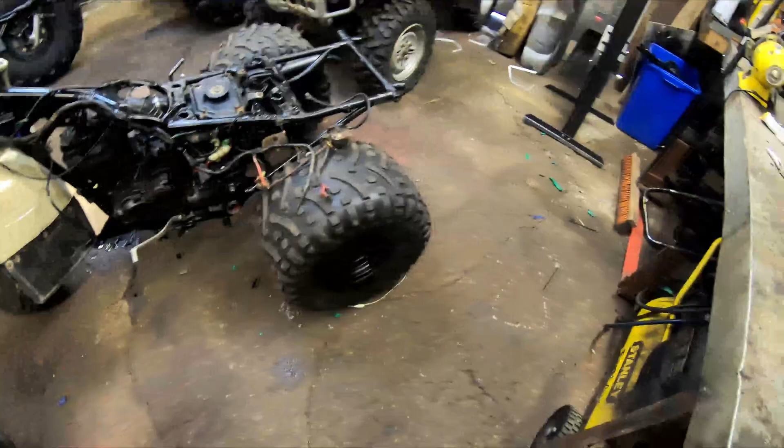Okay guys, so we're all half clean here, I can kind of see the floor again. So alright, I got some of this stuff buttoned up last time, and I'm going to continue on here now.

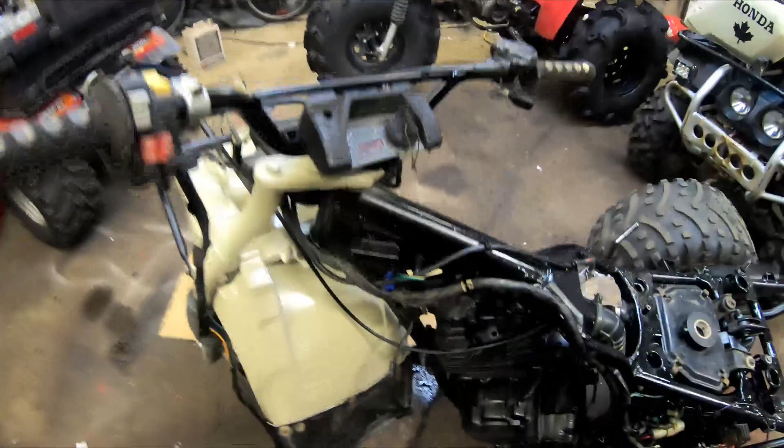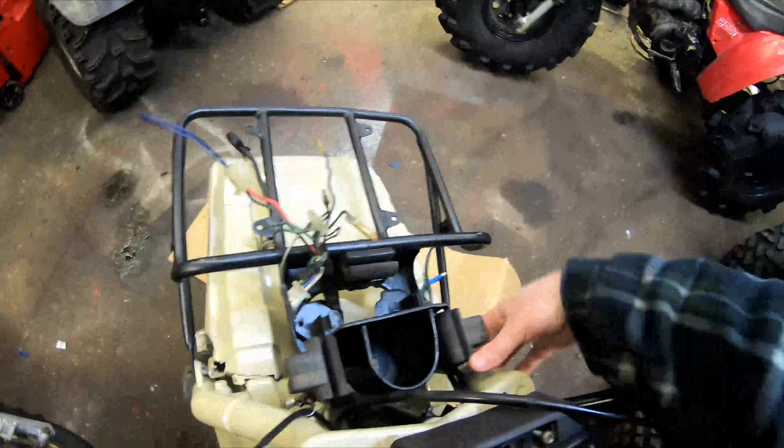I'm going to fix up all these connectors right here for the ignition switch, then tape up this guy, plug it in, test for spark, and then we're going to plug in the wires for the ignition switch and test for spark again.

Once we're happy with that, I'm going to go ahead and put on a headlight. Basically, as I add components in here, I'm going to be testing for spark each time, so that if something kills the spark, we'll know immediately what caused it. Alright guys, let's go ahead now and do that.

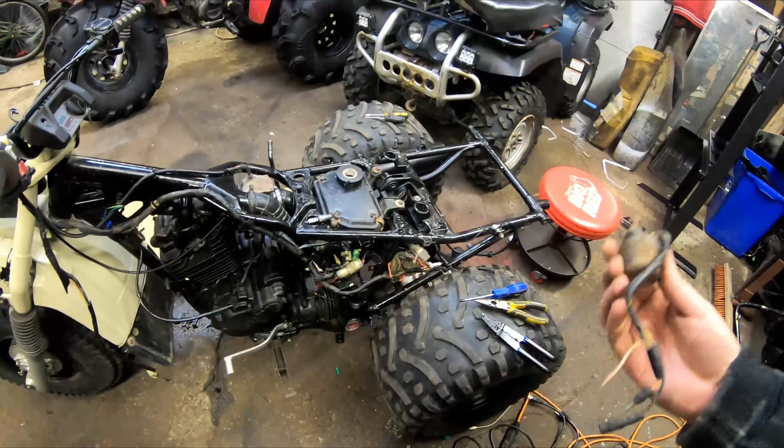Okay guys, still out here in the shed. Just got the battery hooked up for the time being — I got a ground on the frame and the battery hooked up. This is one of the solenoids I found. You can see it has a yellow and red, and the green with the red I was talking about in the previous video. That's the type of solenoid that should be on that bike right there.

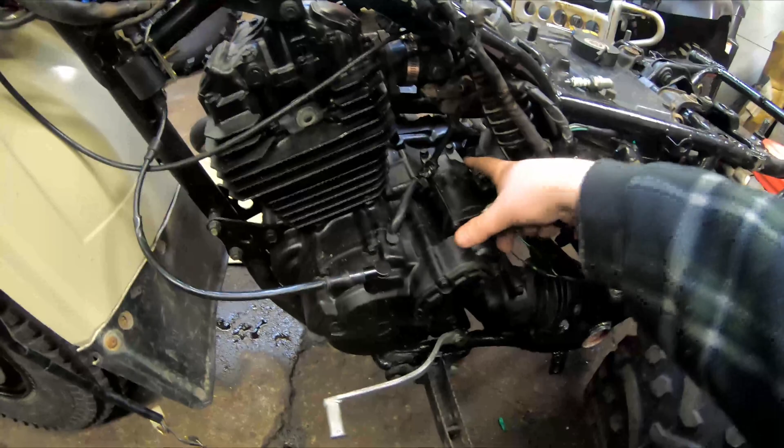So I'm going to go ahead now. With the battery hooked up, I'm not really worried about electric start for the time being, because that starter motor needs to be swapped out. You see the positive terminal? It's pretty loose, and when I tested it, it doesn't really spin. So the electric start will need to be swapped out.

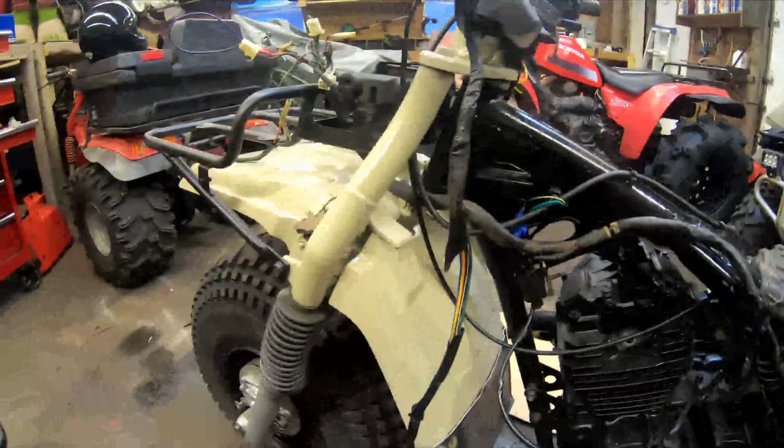But now that we got the battery hooked up, and all these connections hooked up back here, it's still kind of ugly looking. I'm going to go ahead now and hook up the front here — test for spark, hook up that kill switch, test for spark, hook up the ignition switch, test for spark. That way we can rule things out quickly.

Right now I do have spark, so I'm literally just going to plug in the ignition switch here now, and then I'm going to plug in the kill switch, like the module right here. Alright, let's do that now.

Okay guys, so I literally just hooked up the ignition switch — this is temporary, keep in mind. But green to green, black to black, red to red, and black-and-white to black-and-white. Test it again, and I do have spark.

So now I am going to plug in this connector and tape this up as well, because that's kind of exposed — the outer sheathing is broken. So I'll plug that in, and theoretically I should still have spark.

So we're getting down there — we know the ignition switch is okay, we still have spark with everything hooked up. So let's go with that, and then I'll plug in the headlight. I think the bulb is gone in the factory headlight, so for testing purposes I'll plug in an LED. But we're getting there, we're getting there.

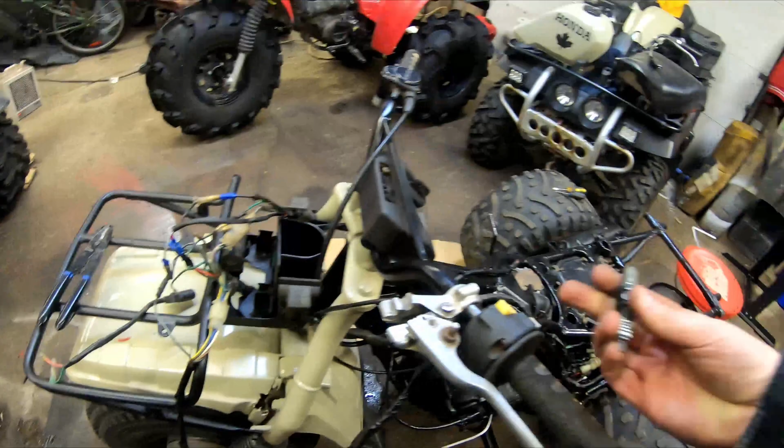Okay, so we got that big old behemoth assembly hooked up, and we have spark again. I keep testing it, and we have spark. Perfect — that means everything should theoretically be functional, and we should be able to kill spark when we need to.

So let's see if we can hook up a headlight now. Not much to it — we can see we have a connector. Green is ground, blue and yellow — one of them's high beam, the other's low beam, I never remember which. So I'll test it out now. I'm pretty sure that bulb is gone, but maybe I've got a bulb in there.

Yeah guys, as you can see, she is a pretty strong runner. Keep in mind now that the exhaust needs to be clamped in place — she needs to be put up in place and those bolts need to be tightened, so she's a little bit noisy.

Like you can hear the air escaping from her, but yeah, I think she's gonna be a good little woods bike, trail bike. She's probably not gonna win any beauty pageants, but that's alright, because I don't really care about looks when it comes to bikes. If it's got a dent on it, or a couple scratches, I actually like it more.

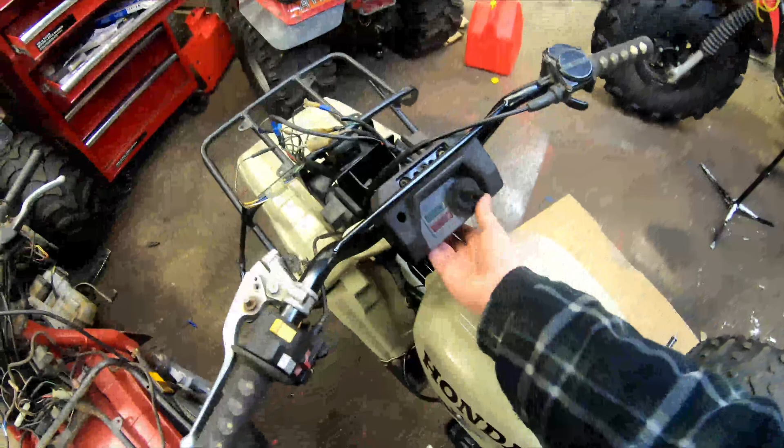I'm not sure if there's even dash lights in here. The bulbs might be gone because I took this off the FourTrax, if you guys remember on the channel, and it didn't work on the FourTrax. So the bulbs are probably shot in that.

And I have to track down a reverse cable. I also need to get a foot peg for the other side. You can see I'm missing a foot peg. Yeah, missing a foot peg.

This is us going in place here now. But I'll show you how funny this stuff is. So we're buying big red parts. I tried to get a right foot peg, and a fella wanted $50. Kept looking around, and guess what?

I have a big red 250 frame that's in relatively good shape, an okay set of forks, fork lowers, and 2 good foot pegs. Got that for $50, the whole thing. So buying big red parts is kind of funny sometimes—you buy more for cheaper, usually how it goes. You buy one little thing and it's a fortune.

Yeah guys, she's coming along. I have to clean up all the oil that spilled the last day. Kind of looks like a mess out here, but at least she runs. I have a good strong runner. See how much I can get buttoned up now, and then who knows, maybe we'll do a few donuts on this thing, see what she's like in the snow compared to the big girl.

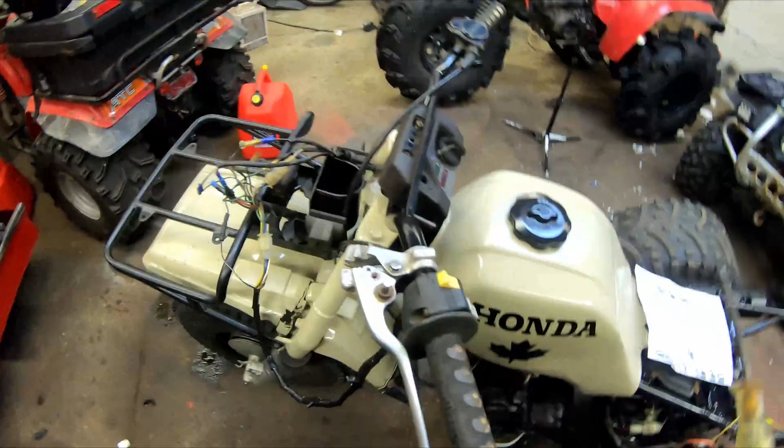Alright guys, let's go ahead now, get the exhaust all put in place, and mess with the headlight and all that stuff. So guys, I was kind of just testing my little test light I got, a really old-fashioned one. Kind of figured out my headlight wouldn't work anyways.

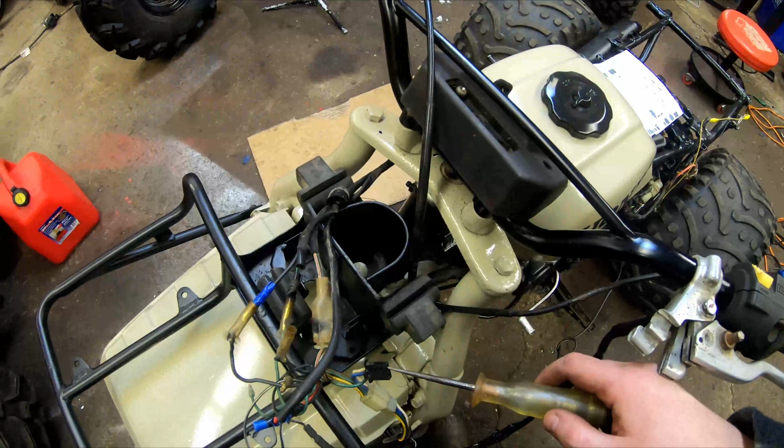It's because I got this over on the ground. I have no power, so I think that has something to do with these little accessory pieces. Like you can see the brown with black, and this black—watch this. You can see the black is the switch power. You turn the key off.

So I'm going to have to look at that diagram now, because I think that's what's going on. Even if I plug the headlight in here, there should be a switch power connected that's going to power up that headlight. So I think that's what's going on. I have some type of issue there I'm not aware of at the moment, but that's alright, I will figure that out.

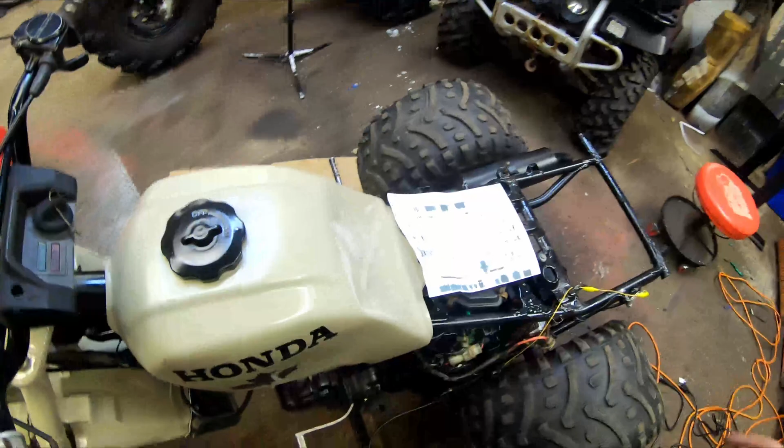It's a fun thing about working on something new anyways—you get to learn all the extra details, because if it don't work...

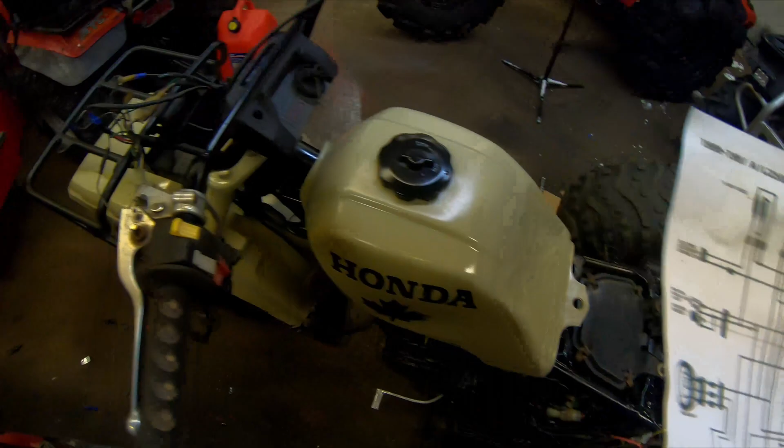Now, another thing I noticed, I wasn't sure what harnesses I got. It seems like I actually have an 86 harness, because that connector there for the headlight, you see how it's a 3-prong bridge connector? That's what I got right here on this harness.

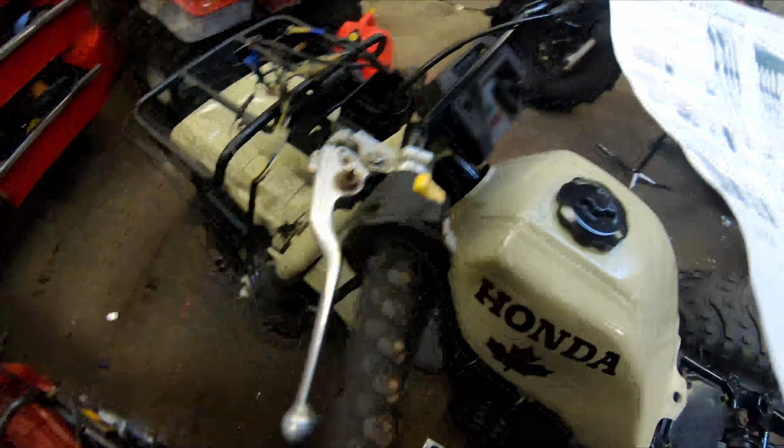So that makes sense. I have to see what's going on, because I think you see these 15 amp fuses, the stuff that normally sits right here. I don't really have any good bike to go off, so I'm just figuring it out on the diagrams, because this one here is a nightmare. I'm not even looking at this bike, because this is its own can of worms right here. I'm gonna go through this.

For some reason all these old big reds tend to be neglected and just hacked apart. I don't know why people do that. I guess it'd get you out of a jam, but it kind of sucks for the next guy, like myself, trying to figure things out here.

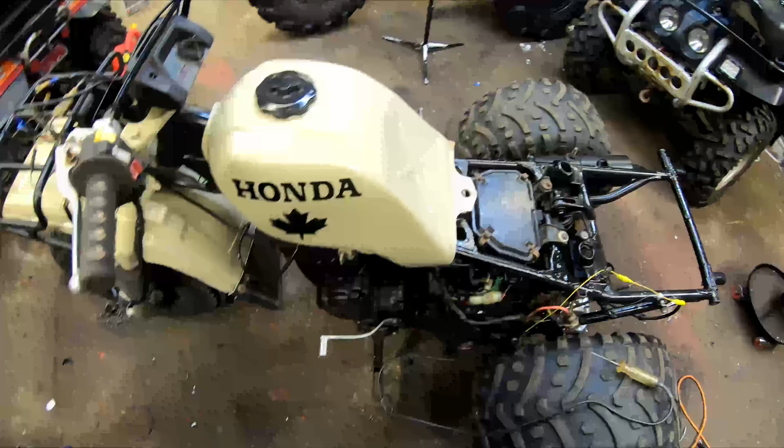But yeah, I'm gonna go ahead now. I think it has to do with the black. You can see coming over right here, we look at the rectifier regulator, so we have a red and black over here, and a dark green. Dark green we know is ground.

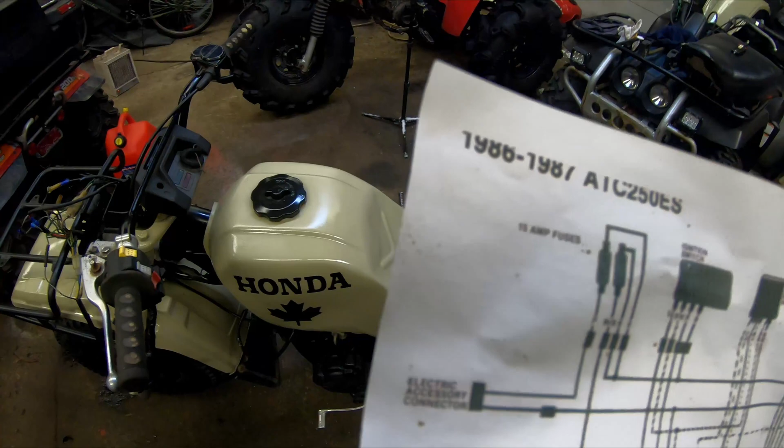You can see the black's coming over here, and it's going into a fuse. Coming from the fuse, it has to power up the neutral light and reverse. It looks like, let's see, it goes off in the accessory. No, alright, I'll figure it out, boys. Leave it with me, we'll see if we get a functional headlight before the day's out.

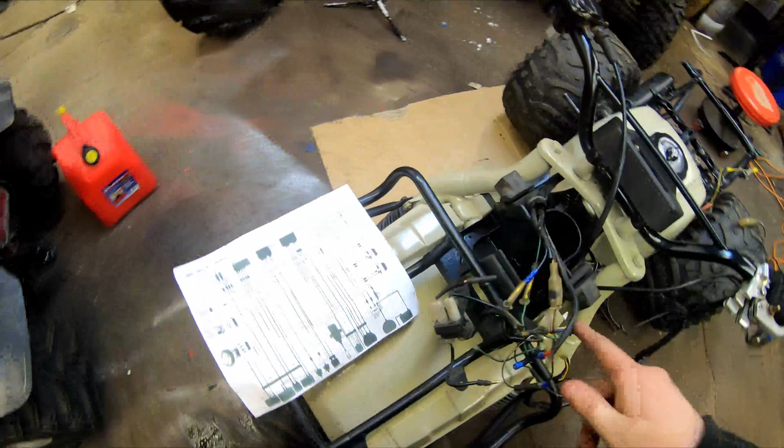So the beauty about this stuff, I basically stumped myself, and I just sat down for maybe 2 minutes. So this is what I was not putting on. I didn't think it was necessary, but apparently it is.

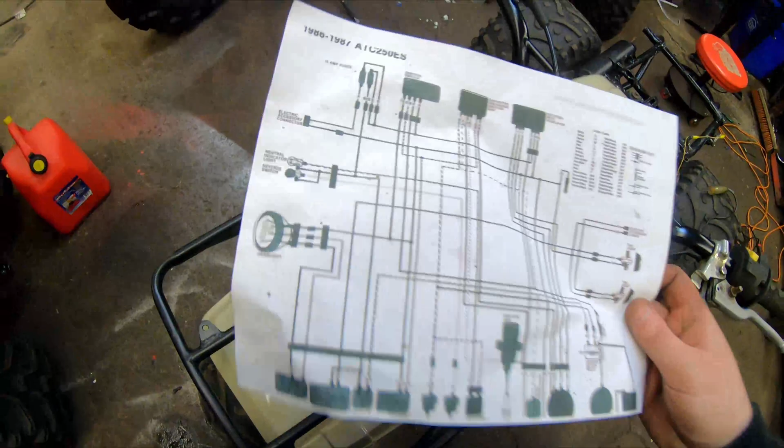So as we discovered, the black is a switched power. You turn the key, you get 12 volts power right away. That feeds into a fuse. The other side feeds into brown with black, because that is how the headlights are powered. They're powered off that main black wire, and that's this part of the circuit.

Makes sense. And this other one, as we can see, the pink, based off the diagram, that goes to accessory. And once again, you see how the black wire comes up, does a loop thing, comes down here and goes to your electric connector. So that's all that is.

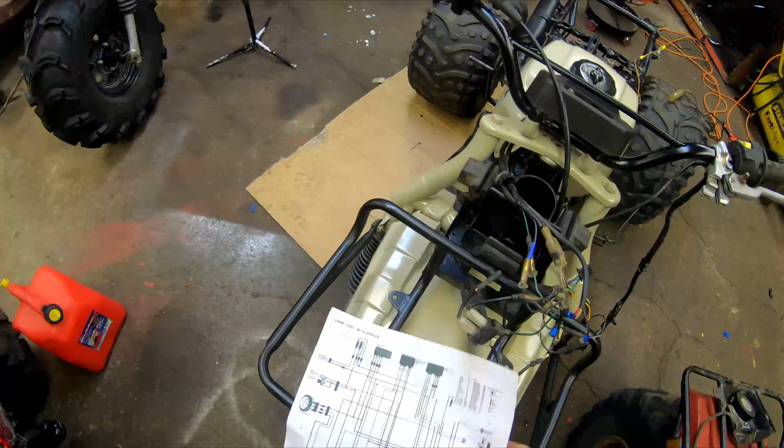So that's cool because I actually have a factory connector over there, so I can probably run an aftermarket spotlight and make it look like the real deal.

But now since this is connected, I'm willing to bet we are going to have power right here. So let's check out here.

Now, take you guys along. Trying to do this one hand here now. We should theoretically have power here. No? Okay, well, I'm checking the ground. Nothing there, nothing there.

Turn this on. No, no power yet. Alright, we'll try it again.

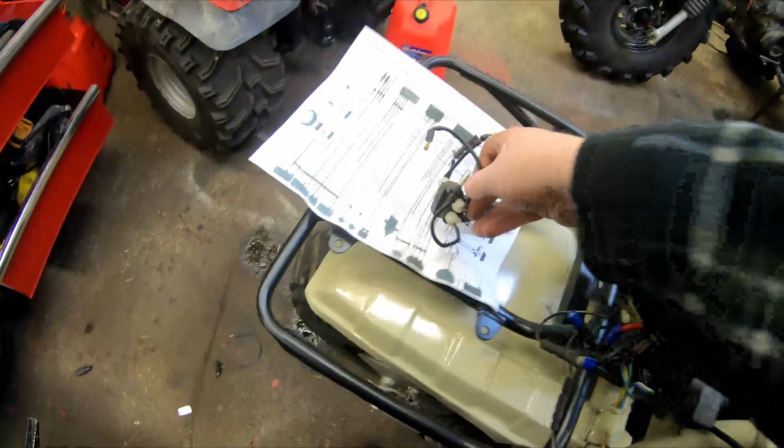Okay guys, I almost lost my confidence in myself. I was like, what in the world is going on? This jobby, the fuse is gone. Because I unplugged it, I plugged the brown and black right into black and bypassed the fuse temporarily just for testing purposes. It will go back, but the fuse is gone.

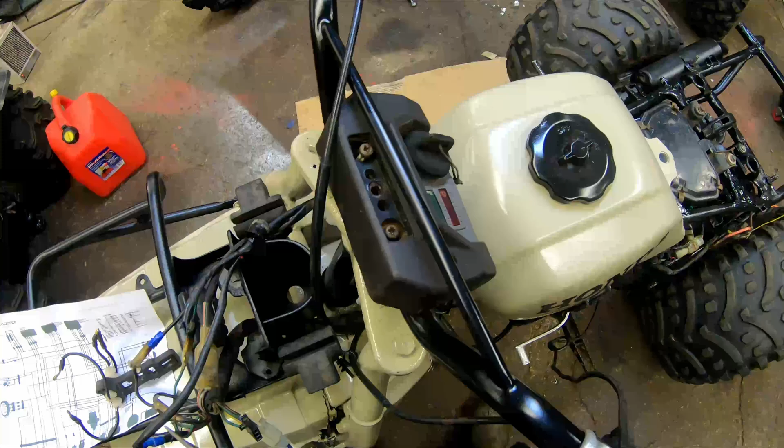But watch, there you go, we have power at our lights. And theoretically, if these have good bulbs and I put it in either neutral or reverse, they should light up. Right now I still have to move the foot shifter because I can't put it back to neutral.

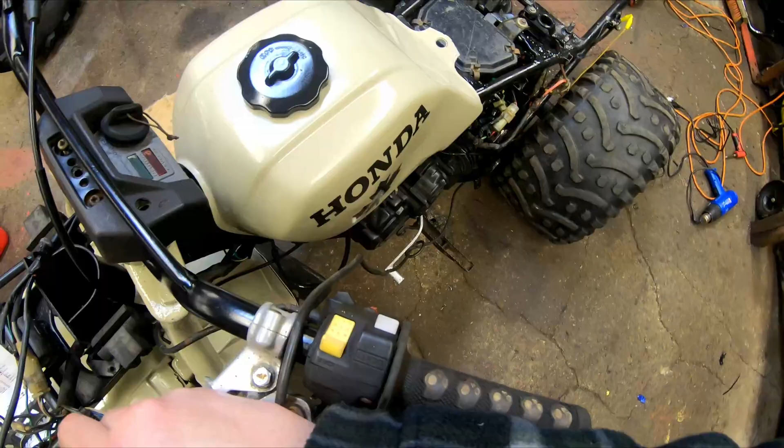No big deal. But that's it, boys. First time working on the 250 Big Red in terms of electrical, and now I have it all figured out. So perfect. These little wire diagrams, the best spot to get one is Three Wheeler World.

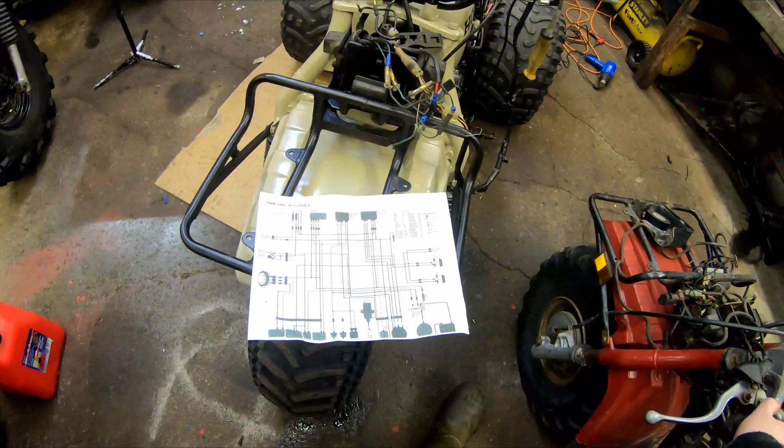Can you see that? Three Wheeler World. They have really easy to follow diagrams, and if you're ever stuck, just drop me a comment down below. I will do my best to help you out. I like troubleshooting and trying to figure things out.

But yeah, we officially have spark. We have power up to the front. We have power down to the back with the tail lights. So the electrical, in my mind, is done.

It's just buttoning it up, and he knows how that goes. A couple days out here picking at it now and then, and she'll be good to go.

So yeah, move the shifter, fix the exhaust, put on a foot peg, and we have this girl halfway to the races.

So you can see over here on top of the bike, my buddy got one of the fenders painted. She's broke on the bottom, but that's alright, no big deal. The other one, it's here somewhere. Oh, it's over on the floor.

So the other fender, you guys will see, I picked up a little tool. We're going to go ahead and plastic weld the fender, and I'm going to paint it over just so I have a fender for the other side. But we're well on our way.

We almost have a fully running bike. Well, we do have a running bike, but we almost have a completed bike. I'm going to keep picking at it here and there. I'm not going to spend a whole lot of time on it recently, so I'm going to be doing a few ride videos and getting the garage tidied up.

But yeah guys, I am pretty pumped. So now I fully understand all the 200 bikes, and now I understand the 250s, and it makes sense. So hopefully this video might even help someone if they're troubleshooting.

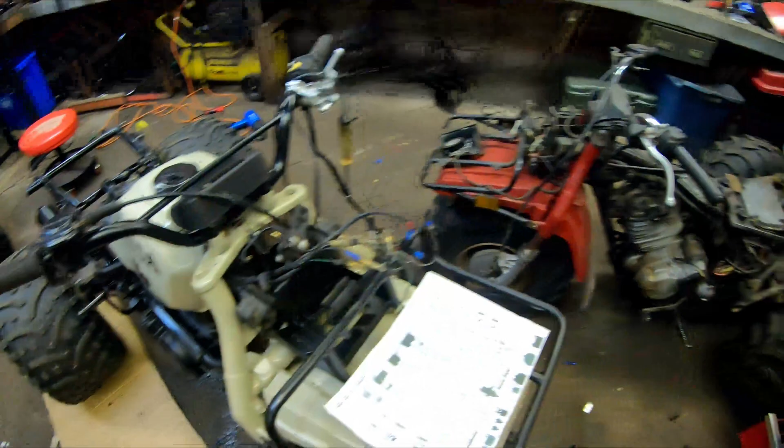She's going to be my clean 250. This one's going to be the Woodsmobile that takes on trails. This one's going to be the one that looks like it's mint, hopefully.

So she has a lot of issues herself. But you'll see this one in the channel getting built eventually, maybe later in the spring or whenever I get time.

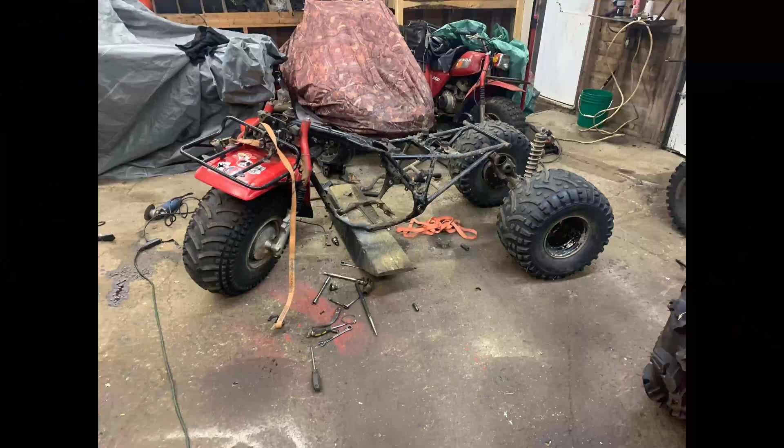I've been dreaming on in my head like I've seen it. A life worth living is a life with meaning. I'll do what I love till my heart stops beating. I'm feeding this demon. Got a taste, can't erase bitterness in my face. Work a job every day till your dreams fade away. Like a card, never change, play the game that we say. I need a break. And I'm staying strong, need to move on to be what I want. I'll keep dreaming on. And I'm staying strong, need to move on to be what I want. I'll keep dreaming.